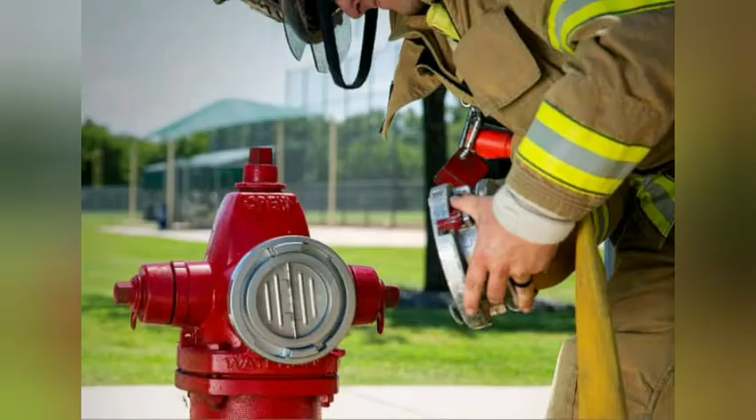The topic we are discussing is fire hydrants. We know that in order to take care of any fire hazards, we provide fire hydrants as a backup water supply to take care of those kinds of hazards. So these must be kept in every place in order to take care of accidents.

It is not always possible that the fire van or fire vehicle will come and extinguish the complete fire that has taken place. So in order to take care of this, fire hydrants are provided at certain distances to take care of that particular spot or area. So let us check the things related to fire hydrants and their types.

Typically, a fire hydrant is an outlet provided in a water distribution main or sub-main, that is, a pipe of at least 15 centimeter diameter, for tapping water mainly during fires. They may sometimes, however, be used for withdrawing water for filling municipal water tankers. So these will be kept as a backup. In most cases, the purpose is to take care of fire accidents only. Sometimes, in case of droughts, they can also be used to fill up municipal water tankers.

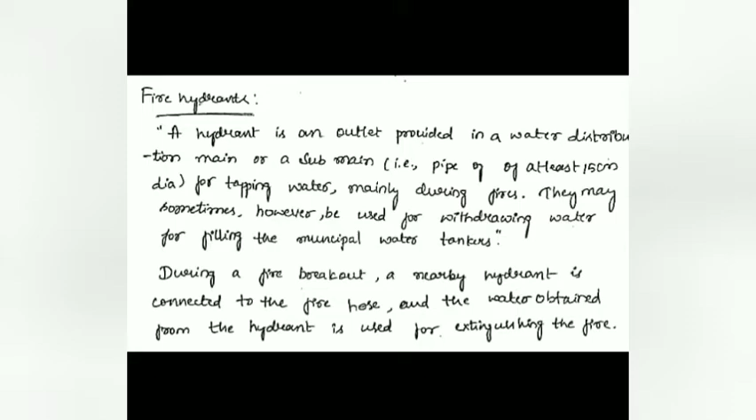During a fire breakout, a nearby hydrant is connected to the fire pipe, which we call a fire hose, and the water obtained from the hydrant is used for extinguishing the fire. This is the intention of providing fire hydrants. The fire engine will draw water from the hydrant, boost its pressure within the engine, and the high pressure water will come out from the outlet of the engine.

So whenever the fire engine comes out, the vehicle will come without water. It will find a nearby fire hydrant, connect the pipes to that hydrant, and boost the pressure so that it can reach greater heights, and this high pressure water will come out from the outlet of the engine to which the hose pipe is connected. The other end of the hose pipe will finally carry the water to the building at a pressure of at least 30 meters of water head and through a smooth nozzle, generally 28 mm in diameter.

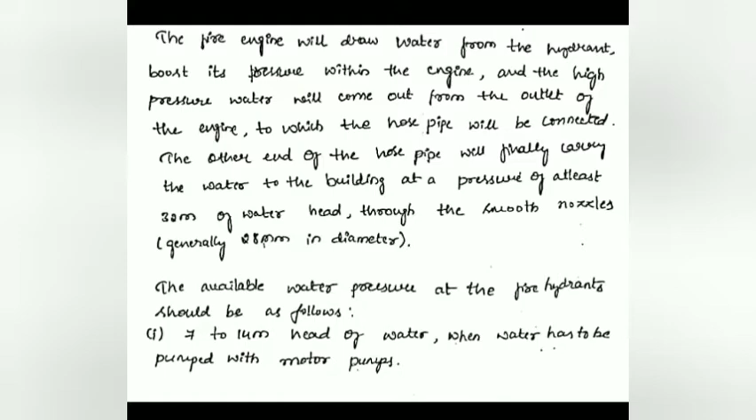See, these pipelines will have a nozzle kind of structure. If the pipeline is present like this only, there is no pressure developed. In order to make it, we provide a structure called a nozzle. We reduce the area of the opening so that the velocity and pressure we get are of the required value. So to achieve that, nozzles are provided, and the fire engine also helps to bring out the required pressure in the water.

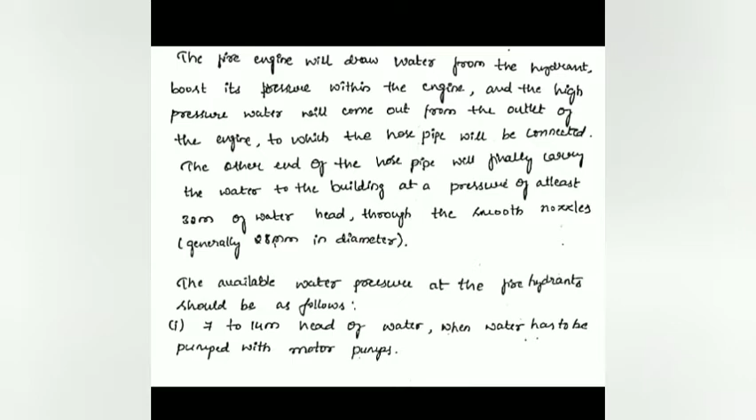Next, let us check. The available water pressure at the fire hydrants should be as follows. First, 7 to 14 meter head of water when water has to be pumped with motor pumps; this much head should be available whenever we are using motor pumps. In the second case, 36 to 50 meter head of water should be available when the direct flow from the hydrant is to be used, so that it can rise up to 36 to 50 meter head of water.

Next, let us check the requirements of a good hydrant. These are the characteristics needed for any hydrant to be called a good hydrant. First, it should be such that connecting it to the hose or to the motor pump is easily handled during fire accidents. So it should be easy to handle, with easy connections available. It should not be difficult to connect the pipes or hoses to the fire hydrants.

Next, it should be cheap. Third, it should be easily detectable during the panic atmosphere of the fire. So its visibility should be made easy in order to identify it during accidents.

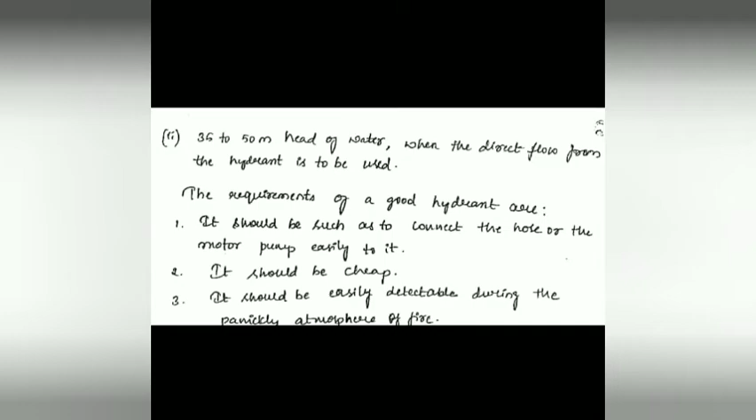Next point we are considering is it should not get out of order during the operation. Means it should be under maintenance so that it will not come to repair or get out of order during the operation. And on being fully opened, it should allow undisturbed water flow. The flow of the water we are getting from the fire hydrant should be continuous in nature.

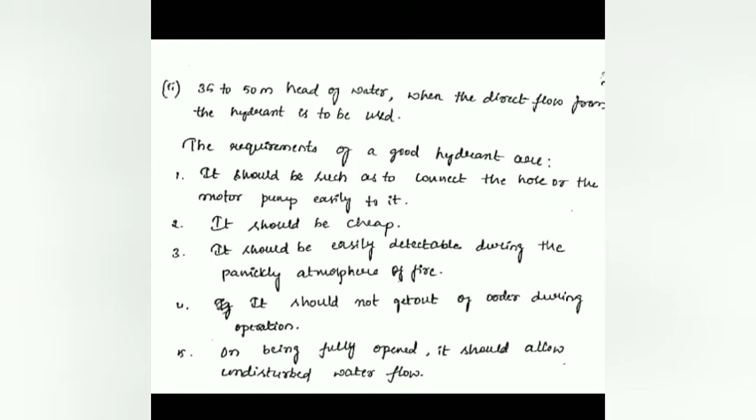After this, let us check what are the different types of fire hydrants. Two types of fire hydrants are mostly used. One is a post fire hydrant, second one is a flush fire hydrant. The difference between these two types of hydrants is, the post hydrant remains standing above the ground like a post by about 0.9 to 1.2 meter. Because of this it is easily visible.

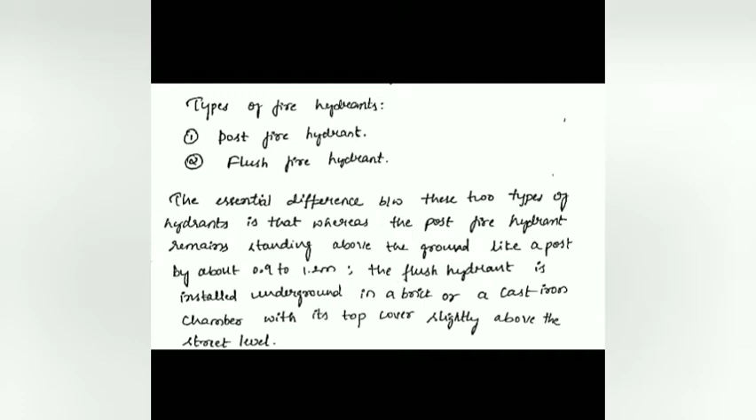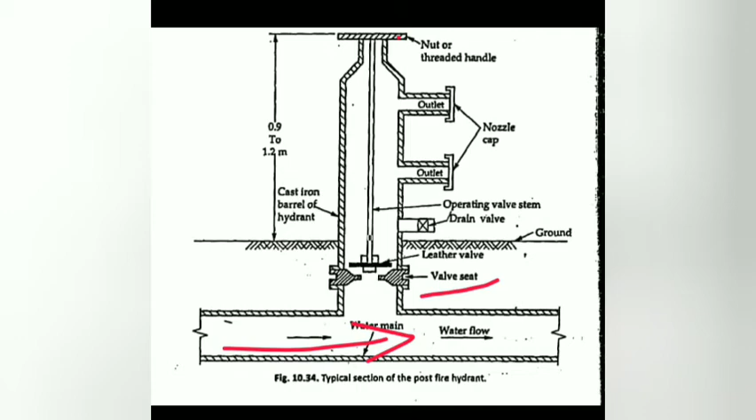This is a water main or a water pipeline in which water flow is taking place. This is a valve seat, this is a leather valve, and this is a nut or threaded handle. When the thread is handled, it should be capable of opening the valve. This is operating valve, stem valve or a drain valve. This is the ground level. These are the two nozzles to which a pipe can be connected during fire hazards. Pipes can be connected and valves can be opened so that water will be suddenly released.

So it generally consists of a barrel of cast iron which is connected to the water main passing the street. There is a valve stem having a good leather valve at its lower end, and the valve stem at the top is connected to a nut or a handle to regulate the flow. In a closed position, the leather valve rests against the valve seat. For opening the hydrant, the nut or the handle is operated or rotated so as to raise the leather valve up, thereby admitting water into the hydrant barrel.

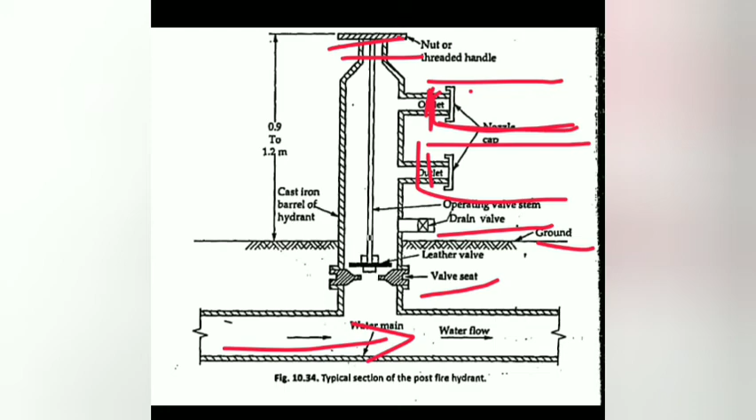And these may be provided with 1, 2, 3 or 4 outlet openings, depending on which they may be classified as one-way, two-way, three-way or four-way hydrants. This is for the post fire hydrant. In case of the flush fire hydrants, there is generally only one outlet opening on the side of the moving stem.

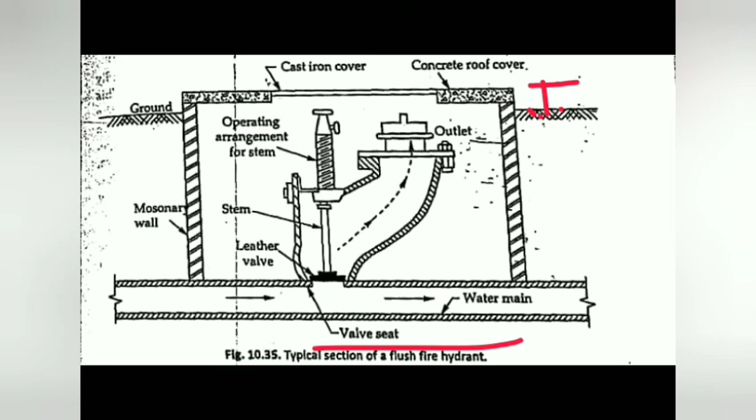When the valve is opened, water comes out of this outlet, and to this the pipelines have to be connected from where water gets released. There is only one outlet opening on the side of the moving stem. The same opening may be directly connected to the hose pipe when no lift is required and may be connected to the fire engine in case of fire accidents. This is for the flush fire hydrant.